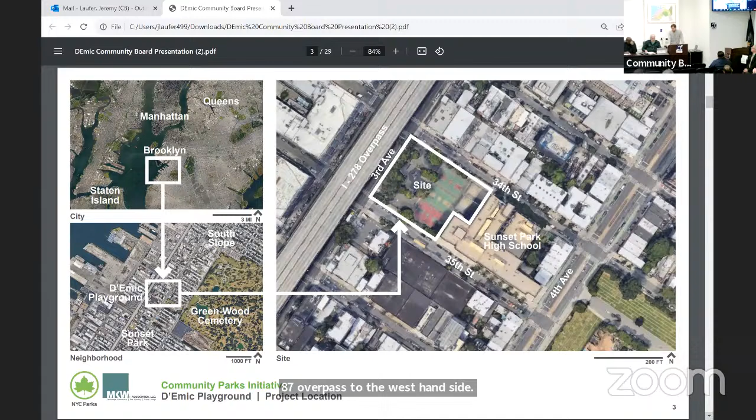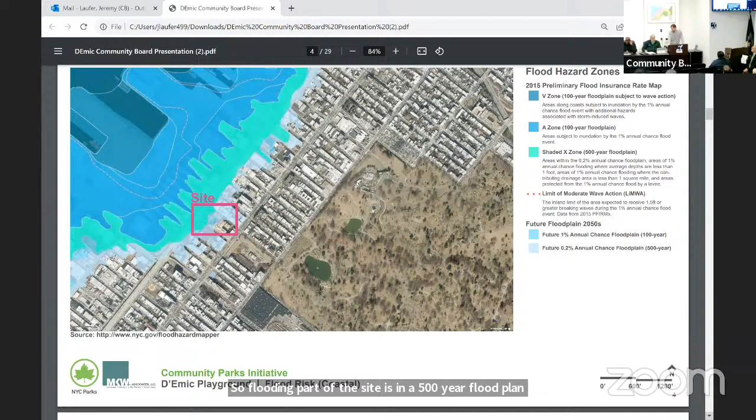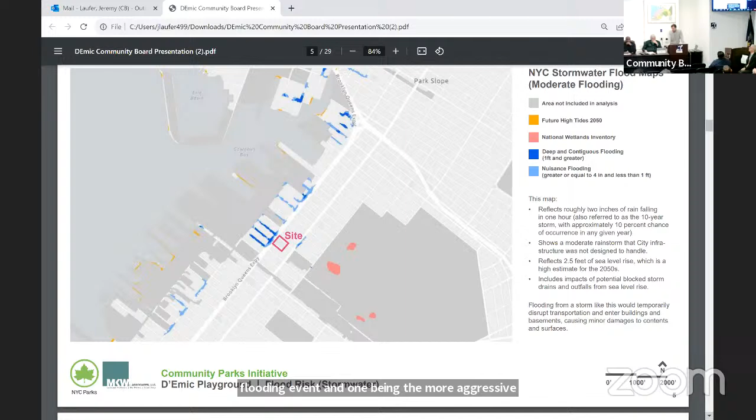Flooding-wise, part of the site is in a 500-year floodplain. The next two slides talk about different flood models, one being a moderate flooding event and one being a more aggressive flooding event. As you can see, the site in both models is not affected by this.

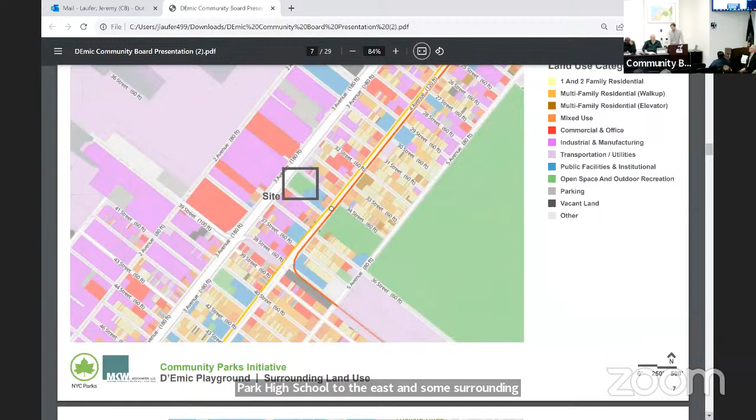In terms of land use, there are several land uses adjacent to the site, mostly heavy industrial, but there's Sunset Park High School to the east and some surrounding commercial as well, along with residential. In terms of parks in the neighborhood context, there are a couple parks to the south and west, but as you can see to the north and east, there are lacking some parks.

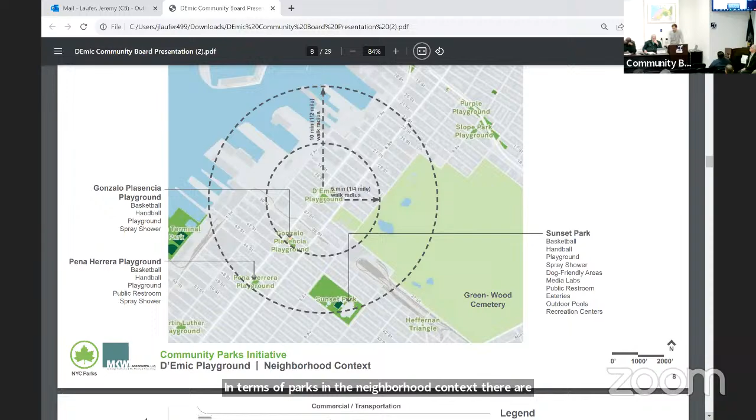Okay, getting to the existing conditions themselves. So the site is defined by this 8-foot-high chain link fence that stretches around the north, the south, and the west perimeter, which really creates a sense of enclosure.

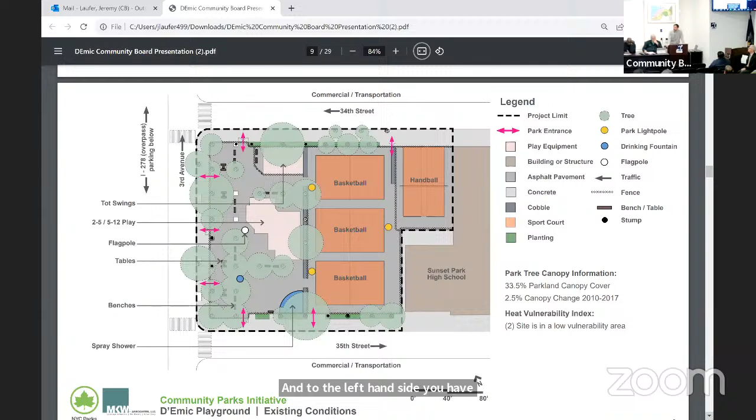There are a lot of existing mature trees on site that we wanted to be very mindful of when designing the park. In terms of program, the site is broken up into two main areas: active recreation sports on the right-hand side, being the 3 basketball courts and the handball court, and to the left-hand side, more passive seating as well as playgrounds for 2 to 5, 5 to 12, and additional tot swings.

More site analysis showing general circulation patterns throughout the project, drainage issues that we spotted, and classifying the site into different areas—such as the basketball courts receiving a lot of sun, the handball courts receiving morning shade but more sun in the afternoon—and then the different circulation access points into the site, a lot along the Third Avenue side as well as 34th Street and 35th Street.

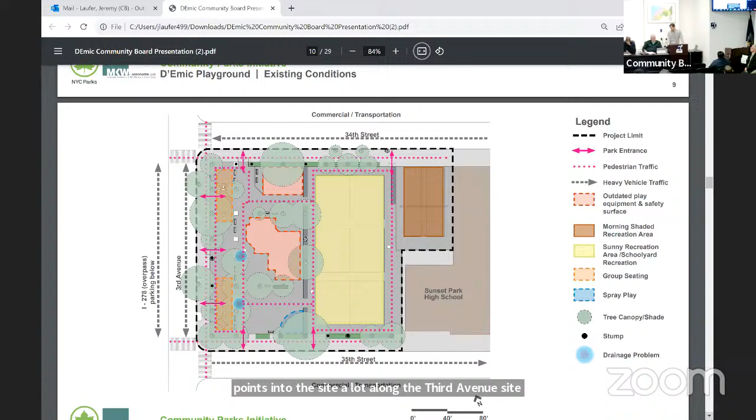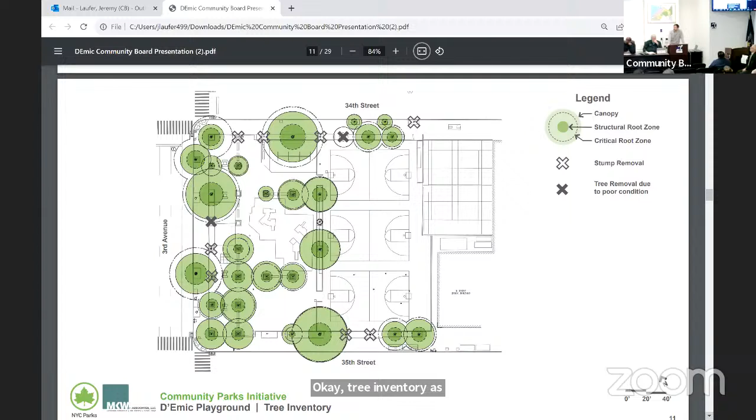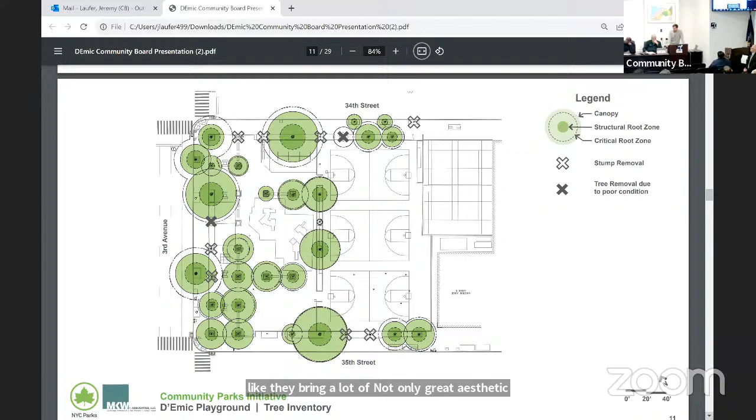Okay, tree inventory. As I mentioned previously, there are a lot of existing trees on site that we wanted to be mindful of in designing the site. We feel like they bring a lot of great aesthetic character, but also provide a lot of shade to the park, which is very needed, especially in the hot summer months.

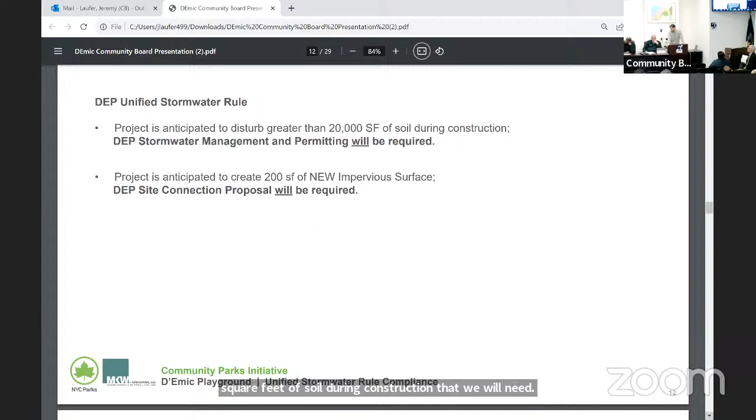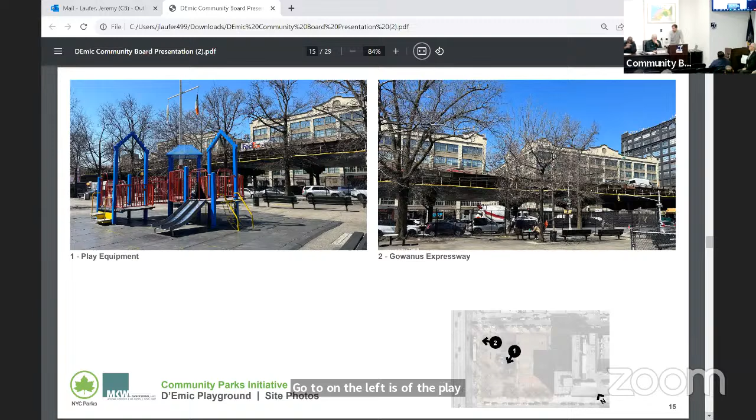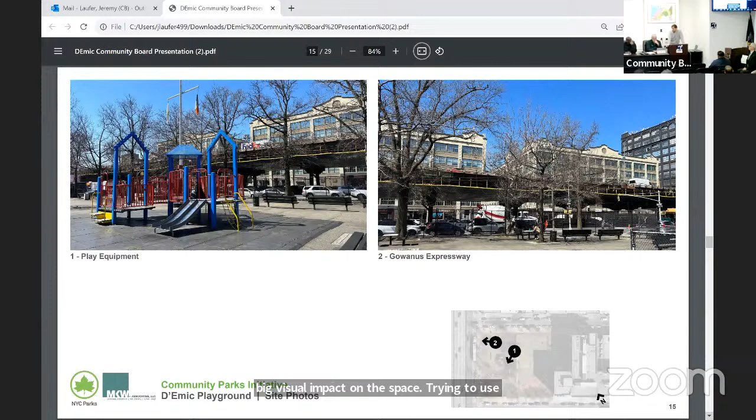Photo on the left is of the play equipment. Photo on the right is of the Gowanus Expressway. As you can see, the Gowanus Expressway is a pretty big visual impact on the space, so trying to use planting as best we could to screen it will be something that Jim will talk a little bit about in the design.

Okay, this is the last slide for me. This will just be talking about community priorities. As Jim mentioned earlier, we had this meeting with the community and heard a bunch of good feedback, so this slide starts to prioritize some of the key points we heard from that meeting: play, active recreation, green, seating, water, noise, and engagement.

For play, really focusing on creating open play, improving the playground that's currently out there, and also adding an area for synthetic turf for multi-use. Active recreation: enhancing the existing basketball courts, handball, repurposing the basketball courts also for soccer, and maybe the potential for fitness in the future.

Green—obviously preserving the existing trees that were out there and adding in as much planting as we could, preferably native. Benches offering a variety of seating, whether individual or group. Water—improving the spray play that's currently out there, and also the drinking fountains. Noise—trying to mitigate the BQE that's adjacent to the site. And engagement—making sure we're creating spaces that could serve a multitude of uses, such as outdoor classrooms, community events, and potentially public art.

So with that being said, I'll turn it over to Jim, and he'll talk about the design itself.

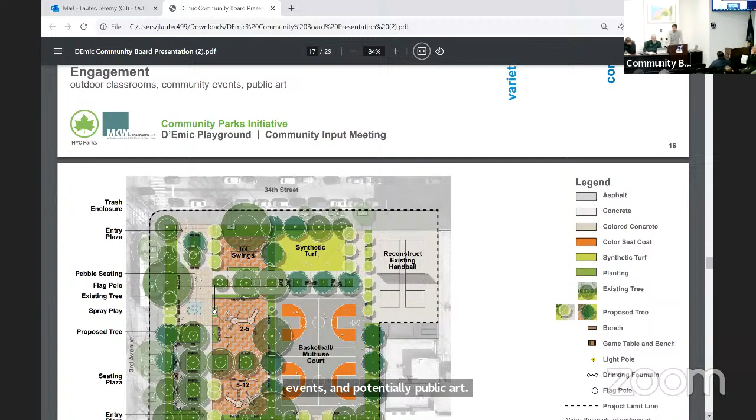Okay, so as you can see on the screen, this is the proposed design that MKW has created for D'Emic Park. We like to think of it in three different zones—the left being the west, the center down the middle, and the right being closer to the high school. We're going to start talking about the project from the west side, from the left side, because that's where we have our main entrances. We have one main entrance on the north, closer to 34th Street—actually there are two entrances coming off of that corner area there.

We didn't want to disturb the tree exactly at the corner, so we shifted it a little bit east on 34th Street and allow people to come in on two walkways into a center plaza space along the west side. There's also one entry from the south side that allows you to walk up from 35th Street into that same center plaza space.

To the left of that south walkway is a seating area with game tables as well as bench seating, but it's a nice, probably shaded place underneath some of the existing larger trees that are there.

Next over to the right would be the center area, where it gets a little bit more active. That's where we have our play areas. We have our tot swings up at the north end. Across the walkways, we then have our 2 to 5 play area, and then just to the south of that, we have our 5 to 12 area.

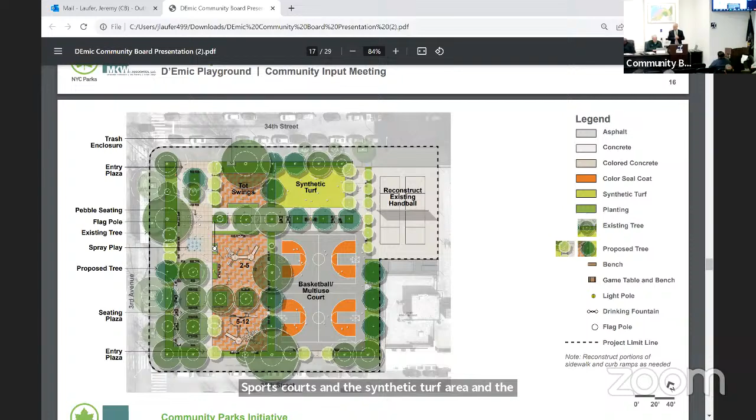So what we're going to show you now is a couple of enlargements. I know that plan was kind of an overall plan. This is the 2 to 5 play area.

Anytime we're designing play areas for New York City parks, accessibility is a key feature. In this place, you can see the different ramps and some of the different features. There's at-grade play panels. The inclusive play includes areas where it's not just about getting people up onto the structure, but having opportunities for different people of different abilities to play side by side. So I think we're really accomplishing that here.

You're also seeing in the play areas, we're playing with the colors, more yellows and oranges to go along with the Sunset Park colors that are associated with the high school there. So that's in the colors and in the safety surface tiles as well. There's seating around the perimeter for all the caregivers watching their kids in the 2 to 5 area.

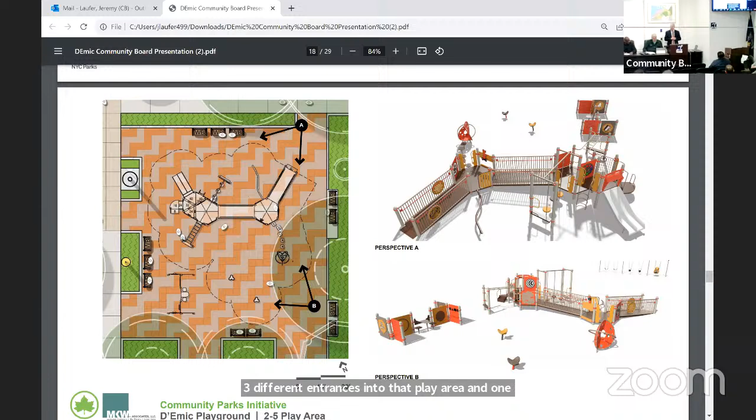And as you can see on the left side there, there are 3 different entrances into that play area, and 1 entrance from the north end from that center mall. Go to the next slide. Next, we're going to show an enlargement of the 5 to 12 play area.

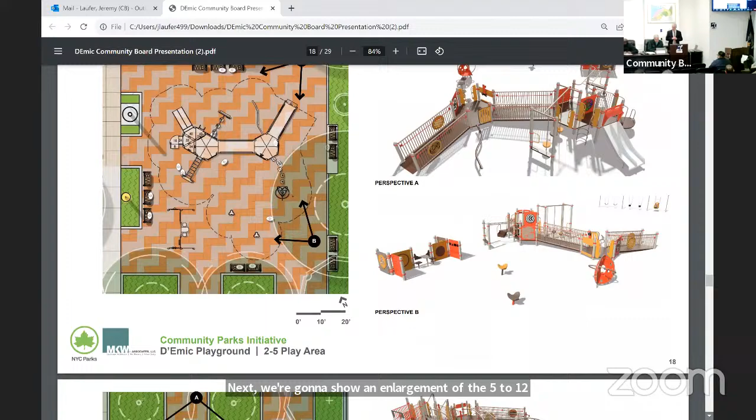We'd like to show an enlargement of the 5 to 12 play area. As the children get a little bit older, the play equipment gets a little bit more challenging. But once again, we are still focused on accessibility and inclusion in the spaces that we design. We still understand that there's going to be caregivers around the perimeter so that they can watch the children play, but we're keeping them off to the side so that they don't have to get involved in everything that's going on with their children. They can kind of let them play.

We've surrounded the play areas with lots of nice vegetation. Some fencing around some of those areas just to keep the children out of some of the vegetation, but it's kind of like a controlled access. It's not actually gated, but it's controlled. There's openings and you can only go in and out in certain areas. So we think that's a nice balance of safety and freedom to move around in the park.

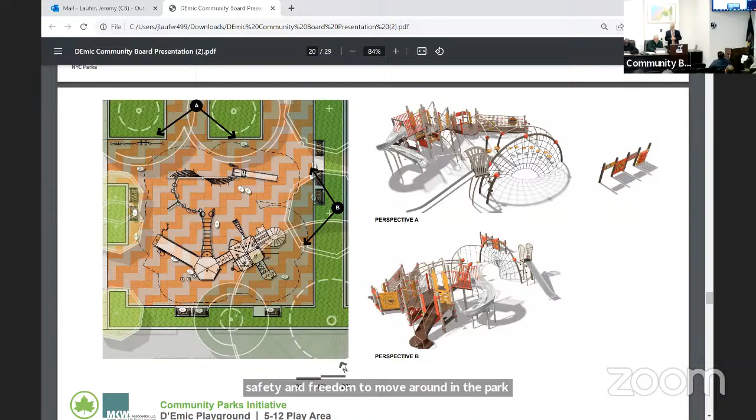The next enlargement is that center plaza on the left side, the west side of the park. You can see the 2 walkways coming in from the north from 34th and the 1 walkway coming in from the bottom of the page, the south. And why do we have this big open space? Well, it's a place for people to gather that don't have children necessarily, so they're not going to be going into those play areas as much.

There's seating around the perimeter. We do have the spray play that'll probably be active in more of the summer months, but when it's not running on the south side, that area will just be an open plaza. Someone can stand there and perform, or groups can gather, or it can just be a big open space and people can get on the ground with their chalk or whatever and draw in there.

On the north end of that open plaza, we have pebble seats, which is just a fun kind of another place for people to sit. And we think some of the teens might enjoy a place like that as once again, a hangout place for them to gather after school.

What you're seeing on the right side are a couple of examples of the spray plays. They're all going to be ground mounted, nothing vertical in terms of metal posts sticking up in the middle of the spray play area. And the bottom is showing a section, which is basically a cut through that area where you can see colorful ornamental tree on the left, some benches, the spray play in the center, and then the flagpole will be relocated, or a new flagpole will be placed to the right side of it.

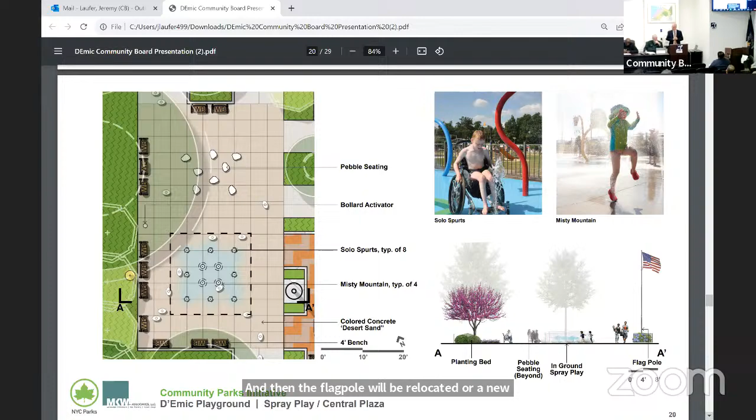This is the area that we were calling the mall, the big connection between the plaza on the left and the handball on the right. It's nice that it has walkways on both sides, provides access to all the different areas of the park, but it also has some nice shade trees, some existing. The smaller ones on the right are going to be new and proposed. They'll eventually get up to the big size as well.

But you can see the game tables in there, the benches. We're going to have a drinking fountain in the center, and there'll just be some lighting in that area as well. The main walkways throughout the park will be lit.

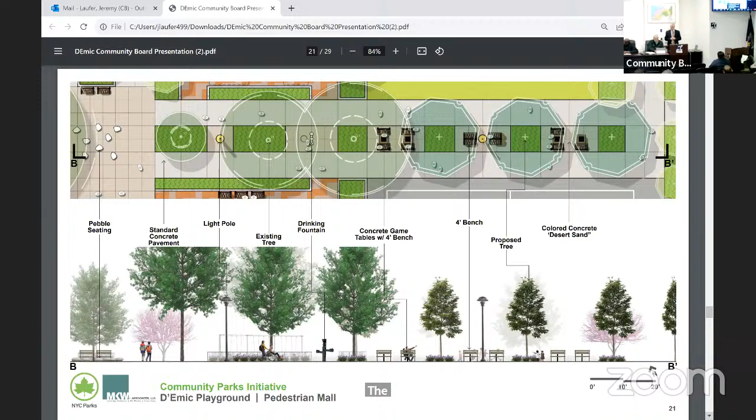This is enlargement of the seating area in the southwest corner of the park. The big circles over top are representing the existing shade trees that are there. We'll have to plant a couple of new ones to fill it out. But really, it's just a quieter space with a nice shade canopy above it. It's going to be really a great place to sit and just hang out, relax.

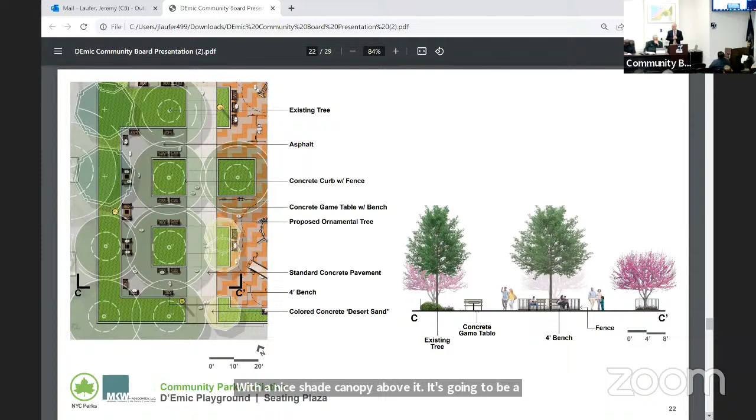As Peter had mentioned, the big fences around the perimeter no longer going to be there. We're going to take down the chain link fences. We're going to put a 4-foot steel picket fence around the perimeter. Some of the planting areas, as you can see with the blue fence listed there, they're going to be 2.5-foot fences. So really just to keep people out of those planted areas.

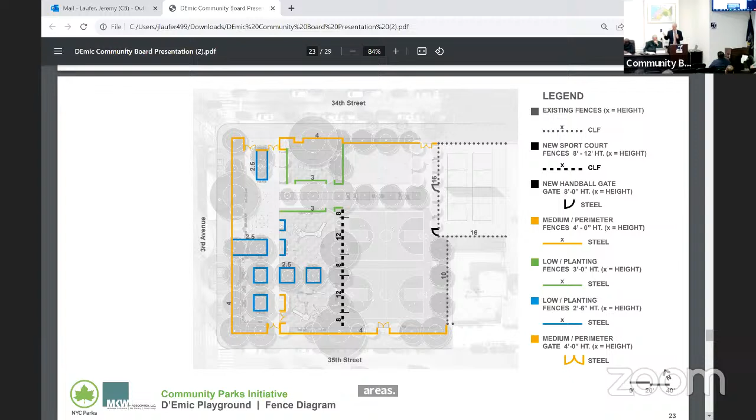3-foot fences around the swings. And then the taller fences will be reserved to be near the sports courts. We're going to use 8 and 12-foot fences around the basketball courts, so the balls don't come into the play areas. And the handball courts, they have their traditional 16-foot fence around that.

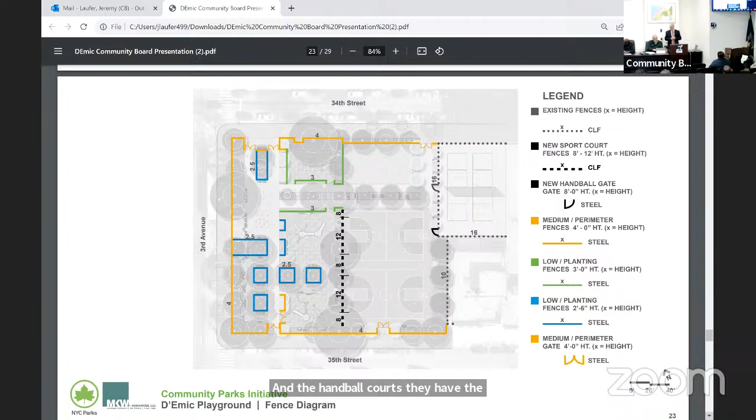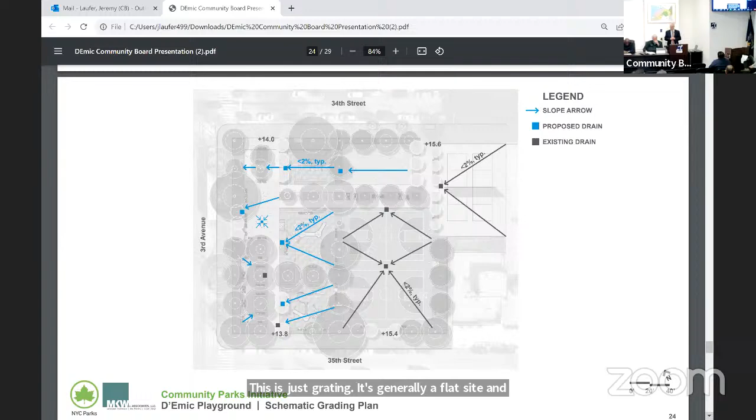This is just grading. It's generally a flat site, and we'll pitch it and try to make all the puddles go away, basically. Keeping it simple.

Other materials we're going to be using are a lot of New York City Park Standards materials, from the game tables. The lighting fixtures would be the Flushing Meadows fixtures, standard trash receptacles. The pebble seats are the only thing that might be a little different, but we had those in the big open plaza on the west side of the park.

We're going to try to use as much native planting as we can throughout the park. Trees that are going to provide shade for the areas, low plantings that won't really ruin any of the sight lines into and around the park. And we're going to try to include a lot of different seasons of color throughout the park when we plant it as well.

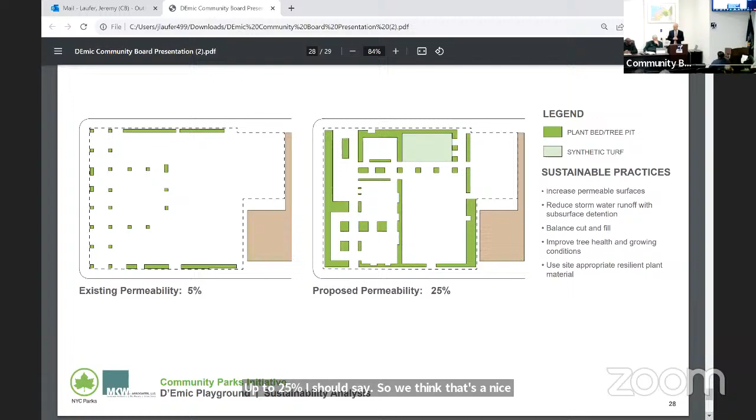So we're finishing up here, going back to the overall slide, and we'll go back to open questions. Thank you.

Before I open up, I just have a few questions to make sure I understand. The equipment, is it being replaced and new equipment coming in? And will that equipment be accessible? All right, good.

The draining, you said there was a draining issue, someone said? There are a couple of puddles there that are depressions, so it's all going to be regraded and newly paved in there. That issue should be taken care of.

There will be a removal of one of the basketball courts just to have more play space area? Is that what I'm hearing? One basket — that's where the synthetic turf area will be, so it'll be for some different types of stuff.

My last question, and then I'll open up. With the trees, will there be some removals and some added in this part? No — when we had an arborist come in and look at the trees, we removed trees that were already gone, that were in poor health. All the rest of the trees currently there will remain, and we'll be adding new trees.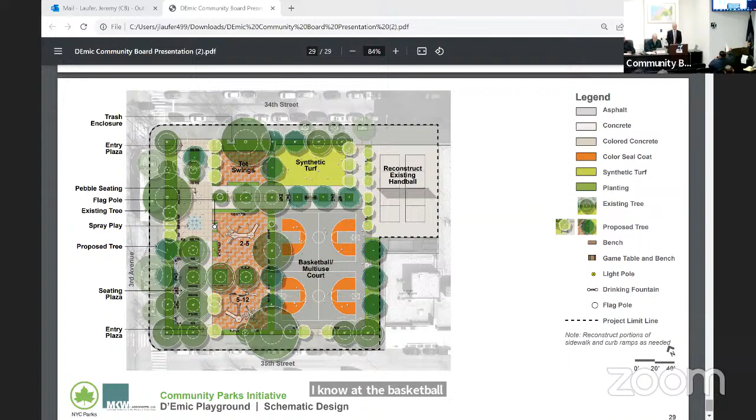I'm just wondering where the benches are going to be located. I know at the basketball courts, families and members play, and their family members watch — how are they going to be sitting around the basketball courts? Or for the handball courts, do we have any seating around that area for people who are not actually playing?

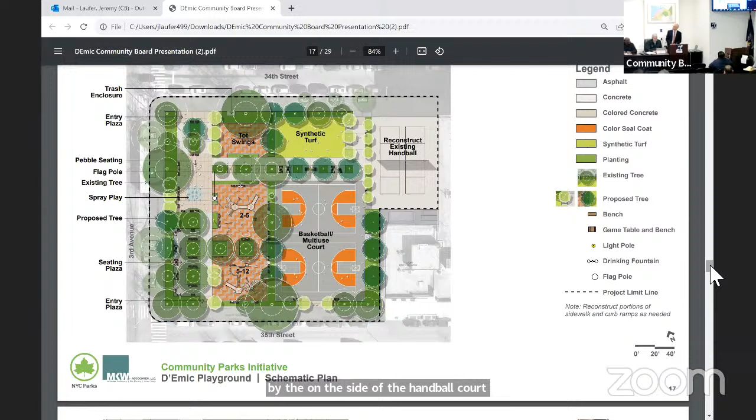There are some benches along the south side of the basketball courts, and I think we were going to include a couple of benches on the side of the handball court. Pointing to the screen here, you can see there's a top tree, then a little brown space that's a bench that could look into the handball courts. Similarly on the south side, there'll be another bench location. So the handball court has two benches looking into it, and the basketball courts have at least two benches looking into it. Sounds great, thank you.

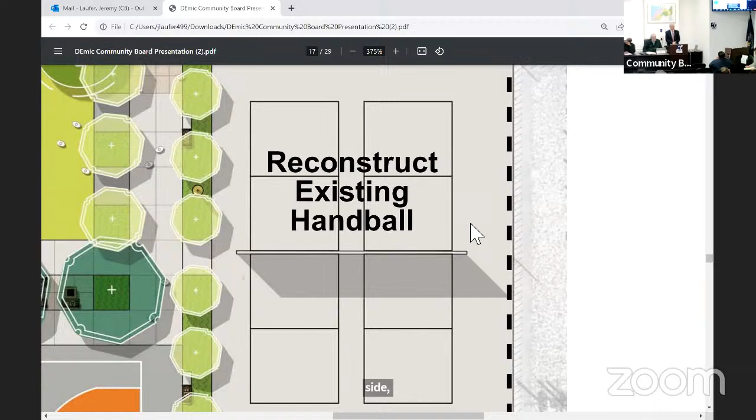I wasn't clear, because you mentioned the importance of screening for the Gowanus, both visually and for noise. I'm not clear from your presentation exactly how you're going to accomplish that.

I don't think we can officially really get rid of all the noise there, so we're kind of taking it out of play by adding more vegetation on the west side of the park. We are adding more trees, definitely at a higher level. So visually it would take out some of the Gowanus there, and we're hoping for more of an out of sight, out of mind approach, because we can't build anything that large to really take away that noise. But by planting more trees, we're trying to visually screen it more, and it's going to work better in the summer months when the leaves are on the trees.

I didn't see any swings, but you had mentioned swings. Are there going to be any swings on the grounds? Yes, there will be swings, and they're going to be in a similar location to where they are currently.

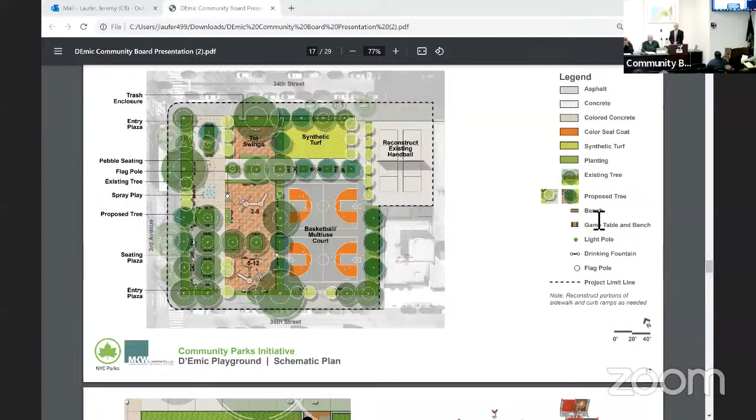Typical construction for a New York City park like this is about 1 year. We're in the design process now. Once that's done, there'll be roughly 1 year of procurement, and it'll still be open during that time. But once a contractor is given the site to work on, they'll need that 1 year to work on it, start to finish. So during that time, the school students won't really have an outdoor activity area at all. Is that correct? Correct.

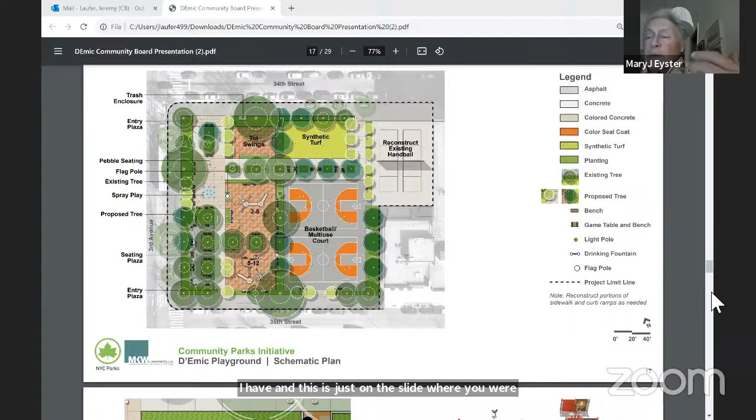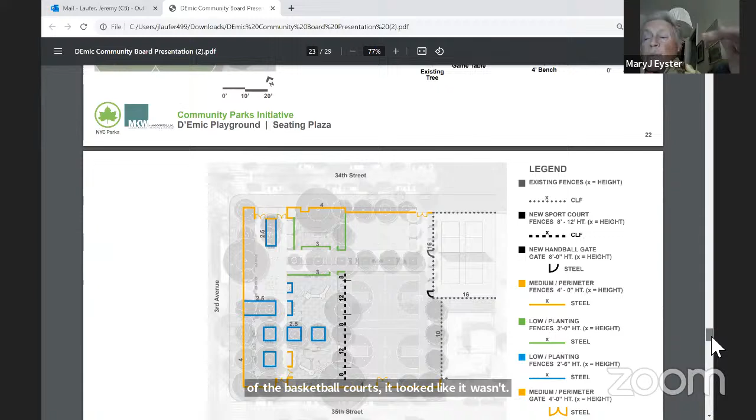One other question, this was on the slide showing the fencing. It appeared that the north side of the basketball courts wasn't fenced off from the walkway. That's correct, we didn't really think a fence was needed in those areas. Loose balls happen everywhere, but primarily at the ends is where we're most concerned about that. So we're okay with that.

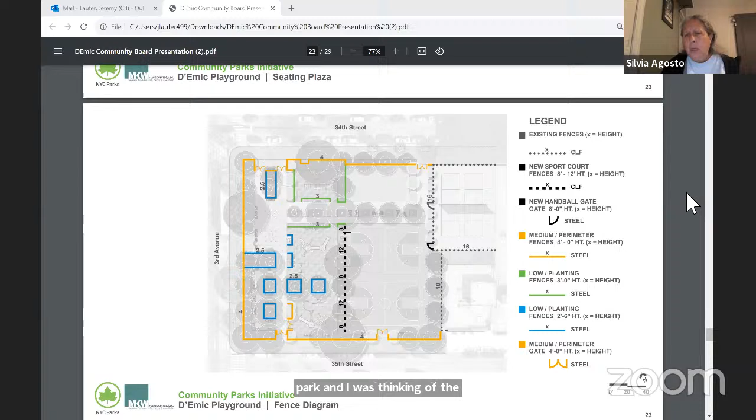Hi, this looks really beautiful, but I am also concerned about the youth. Not only that, but we have young adults who are mentally challenged, who have a program somewhere around there, and they come to the park. I was thinking the adult outside gym would be appropriate also for those young people, because sometimes they just sit there, and it would be great to have an outdoor gym for them and for the students at Sunset Park High School. But everything else is gorgeous, it's beautiful, and thank God we've been waiting a long time for this park to have an uplift, a facelift. So anyway, thank you.

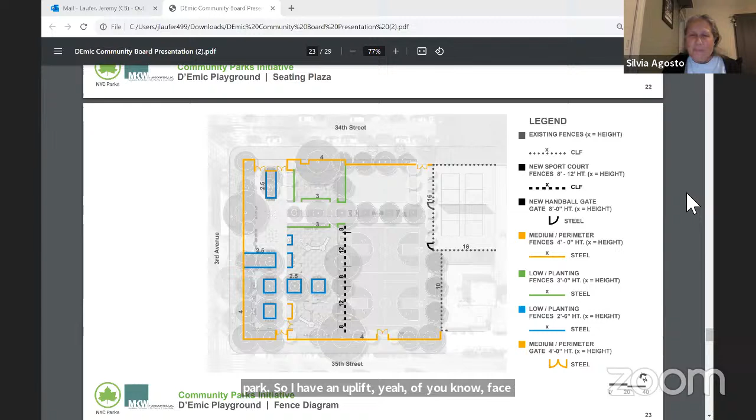Thank you. We heard that comment one other time already, so we'll take it back and talk with the folks at New York City Parks about that.

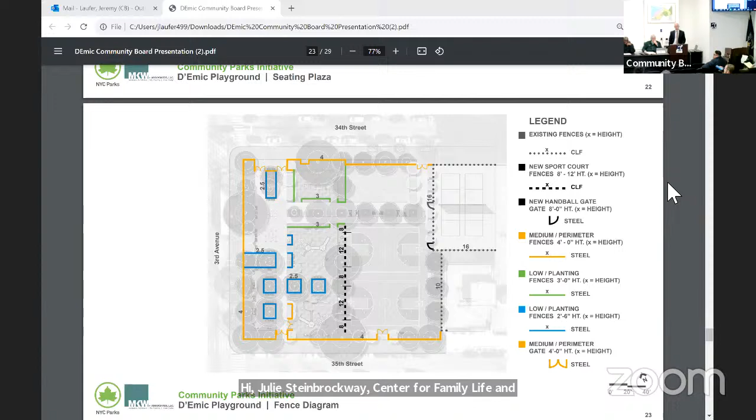Hi, Julie Steinbrockway, Center for Family Life in Sunset Park and a partner at Sunset Park High School. We were part of the original design team when the high school was being built in 2005 and 2006 and so on, so we're glad that we're at this point.

I want to echo a few points that have been made. I think we need to seriously look at the outdoor gym type facility, physical fitness, as a person who's in that high school every day - I know that is a need that could be met.

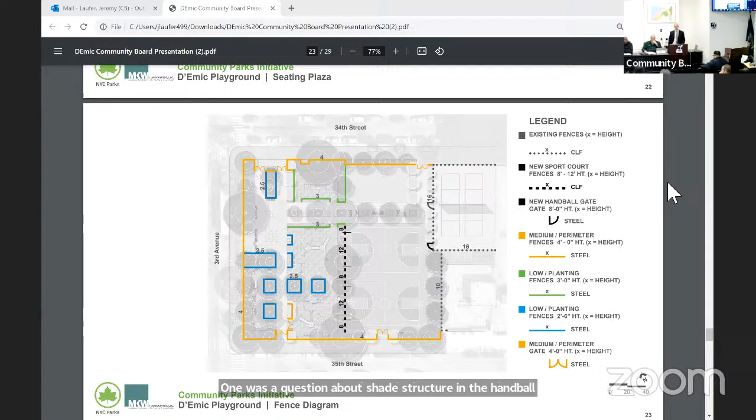A couple of things that came up in the first go-round in June that I haven't heard mentioned, I just wanted to bring back. One was a question about a shade structure for the handball court - there was a concern about how to make that a little more of a shady area, even though it's concrete. I didn't know if there was any canvas tarp option. Some ideas were tossed around, so I wanted to bring that back.

There was also a question about engaging students in stewardship and being able to work with the gardening aspect of the park. We have a lot of students involved in our green club and in hands-on science, and I think if there's some way to engage those science classes in the design during the development phase and then in maintaining the park - we had always envisioned there would be a club that would adopt and work in partnership with parks. I haven't heard that mentioned, and I just want to make sure we don't lose track of that as a desire for the high school.

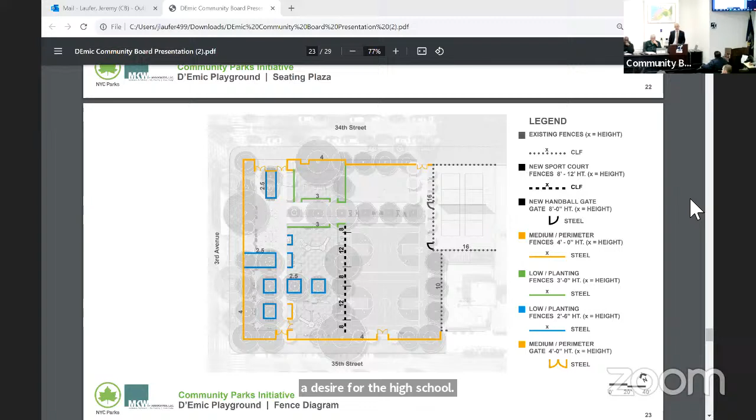There's also a question about the benches - I know there's a concern about who would be in those benches, but there was a question about benches without backs on them so that you could see both sides of the park and sit in either direction. It seemed like very traditional park furniture that we were talking about, and a very traditional park playground.

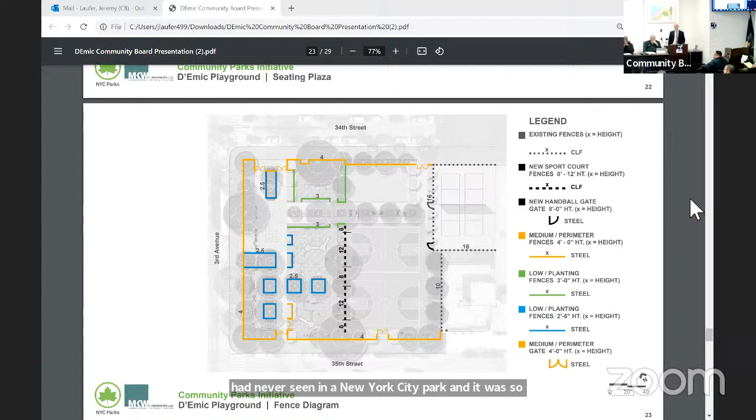I live near the water where they just did a playground that had playground equipment I had never seen in a New York City park, and it was so dynamic and exciting. I was just wondering whether we were getting within the budget zone of things, what would be the difference in cost of upgrading some of those things, and whether we could advocate as a community for additional resources to think about upgrading.

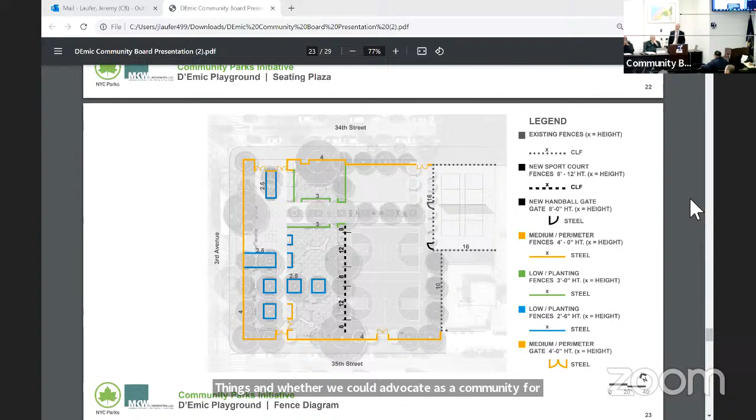Okay, I'll take the one about shading the handball courts. Putting a structure over the handball courts is just big, and once again, considering we have a limited budget, it didn't seem like the best use of resources.

We did put shading on the west side of the handball court - the east side has shade from the building itself and from the south as well. On the left side, we put columnar trees in there, which will get about maybe 12 feet wide but grow a good 30 feet tall, so they'll provide shade into the courts in the afternoons.

In terms of some of the interaction with the high school students, if you want to... You're totally right.

Thank you for highlighting that, because this is so connected to Sunset Park High School that it would be a shame not to involve it more thoroughly. What I can say is we're still in the design process of this stuff. We're getting the bare bones of what we need here. Anything programmatic comes a little bit further down the line.

There is a wealth of opportunity to get involved in terms of having ownership, especially over what we call this, a jointly operated playground. And in Sunset Park High School, getting the kids involved in more of a programmatic way, having a zone for them, is kind of what we were talking about.

And this is a bigger JOP, but it's not huge. We're trying to fit a lot into this site all at the same time, because not only does the school use it in an unprogrammed way with the basketball court where they're just hanging out, it's still a playground, and there are still families around here that need all ages, so that includes toddlers up to 12.

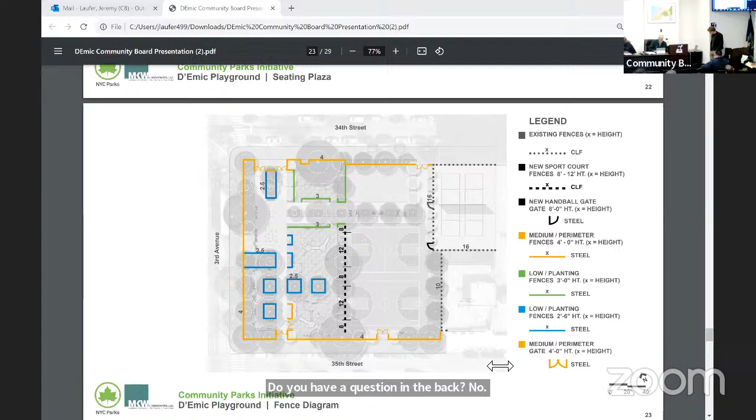Yeah, hi, how are you? Jay Geary, I live on Fourth Avenue now, I'm closing on a house shortly on 33rd. So I'm very curious about the longer term outlook here.

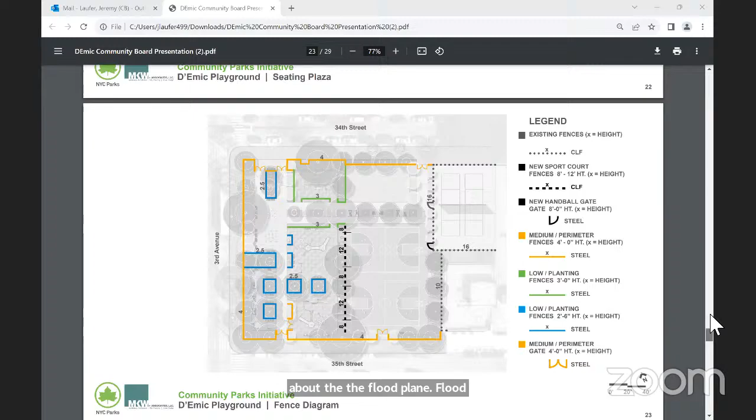I was curious about the flood plain that was mentioned earlier, about where it stands on the current moderate versus more aggressive flood plain, and how those moderate and aggressive models were generated. It seems, in terms of evacuation zones, it's right there in a flood zone, so I don't know how that was taken into account.

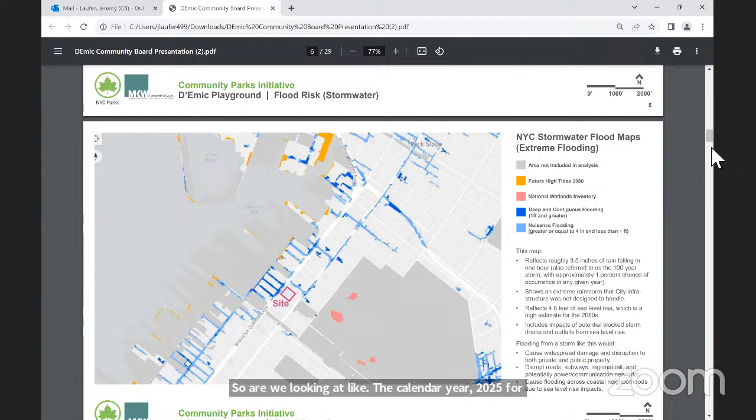I also had a second question on scheduling. It sounds like the plan is 3 years: 1 year planning, 1 year procurement, 1 year execution, and planning is finished. So are we looking at calendar year 2025 for the closure for construction? Yeah, those are my two questions, appreciate it.

I'll let the consultant speak on the flooding, but you're correct. We started this in spring of '23, so that would mean roughly, hypothetically, a spring 25 closure to spring 26 closure. They would lose it for one calendar year, not lose it, but close it.

As for the flooding, the maps you see here are nothing we generated on our own, no specific studies. These are taken from New York City public documents that are available. If you're looking for more detailed information, I don't have the exact website handy right now, but going through nyc.gov you'll be able to find the different flooding maps we were able to get. It's pretty much standard publicly available information.

Any more questions for Parks from online? Any from the floor?

Hello, yes, so my question is... I just lost my train of thought. I'm sorry, yeah, I'm sorry. Silvia Agosto.

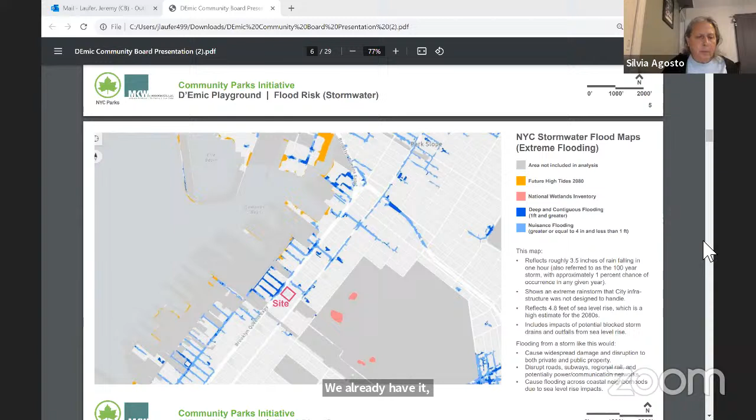Yes, I'm sorry, so I was just going to ask, are we going to be able to see the final plans, chairman? Parks, will you guys come back to us so we could see what the final plans are and how it's actually going to look?

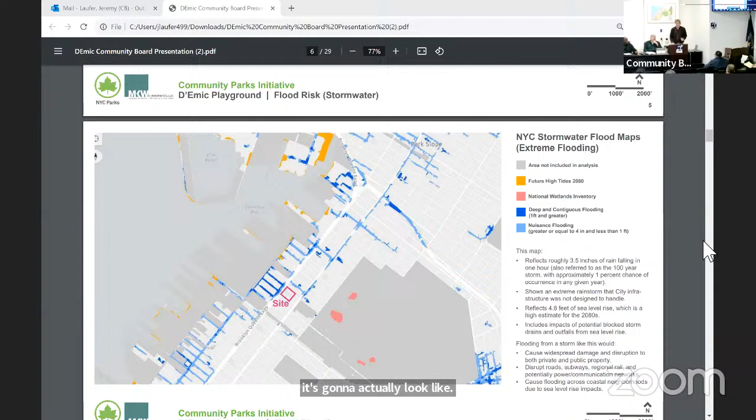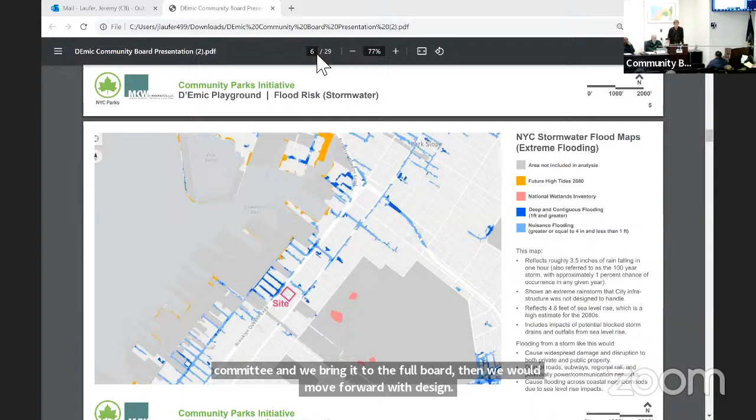You know, we were speaking on this a little back and forth. So I guess the process for this is typically Parks Committee, then we bring it to the full board, who then we would move forward with design. If there is a motion to speak on something you would like to officially change, we could certainly bring back information. But we are subject to a budget, and to a certain layout to fit everything we feel hit all the marks that came up in the initial scope meeting. We do feel like it hit that to get everything. We understand there's desire for more involvement, but is that something that we want to?

I'm just curious, I guess my question is where we would move forward from here. Not to say we'd bring that part back up, but we would bring it back to show you the final design. We would be trying to get a full board approval off of a similar design to this right now. So that is the answer.

I do appreciate that, at least so we could see the final plans. Not to change anything, but just to see what it looks like. Okay, I appreciate that, thank you. Yeah, of course. We will definitely, after we present it to the board, if there are any amendments to what was given to us, have that in the letter so the plan is brought back to us so we could see it. All right, so we'll make sure we have that in the letter. Thank you so much, appreciate it.

I'm one that's always thinking about the money. If there is a delay in approving the plan, is there a possibility of a shortfall with the budget cuts coming?

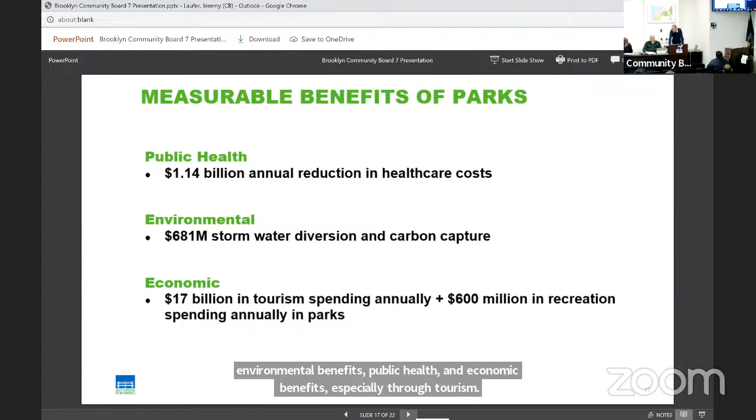Mayor Adams has repeatedly publicly supported this initiative as a borough president, as a mayoral candidate, and as mayor. He has obviously not followed through, so we're holding his feet to the fire as best we can.

44 council members are also in support of this initiative, and no council members are opposed. We also have now close to 13,000 petition signatures, individual New Yorkers signing on in support of this funding campaign.

So here today, to call on the committee, to deliver the recommendation to the board to write a letter in support of this initiative. We've been presenting to every single community board, trying to build broad-based support to show that this is a priority for New Yorkers.

We have so far 36 community boards signed on, and we would be honored if you would join us in this. I'll also add that, in the current budget cuts that parks are facing, combined cuts over the next series of multiple rounds equal about 15% — approximately a $75 million cut to the parks department budget. We're looking at significant cuts to the staffing lines that already exist. So building support around this initiative and showing concrete support for transformative investment, we think is one means of resisting those untenable cuts.